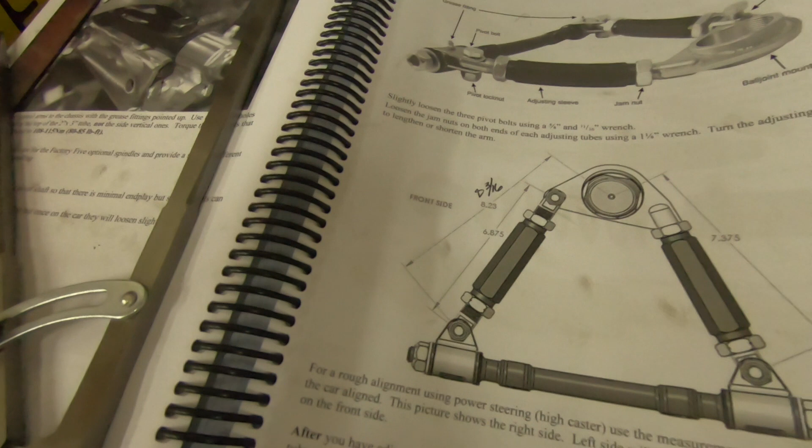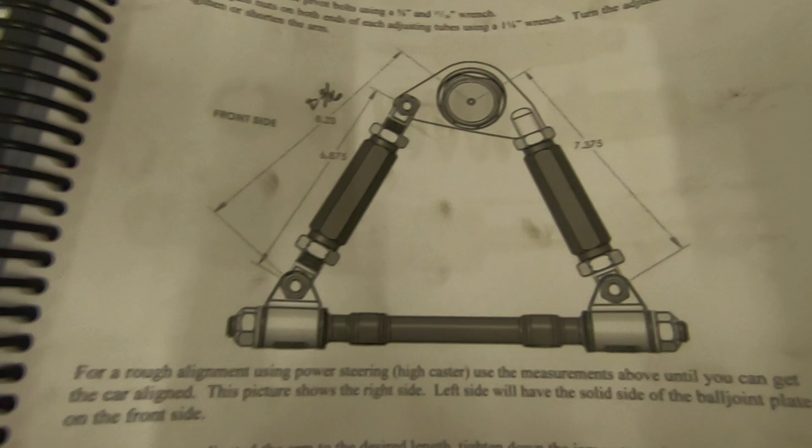I'll show you this first. So I'm going to undo it. Okay, so here is the factory measurements that you need to go off of to rough align your upper control arm, so that you could set it on the wheels and drive it to an actual alignment shop, or do a track alignment with the string method.

This is high caster. I'm guessing they go high caster because in my experience with working with vehicles, more caster gives you a little bit more front end bite. So I'm guessing that's why they're setting it up that way first.

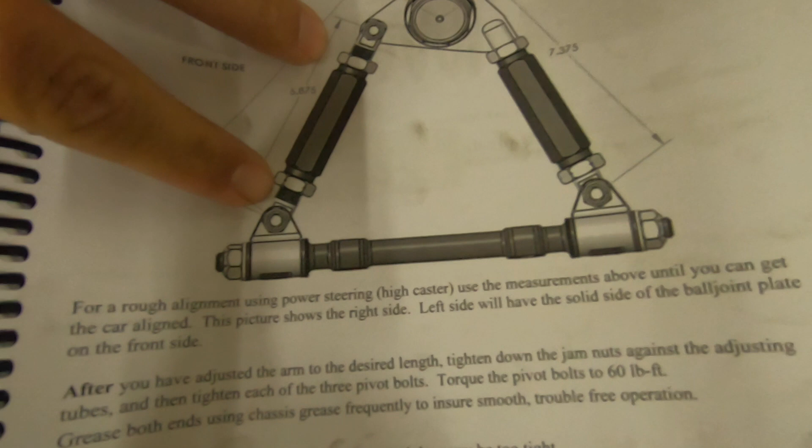So I checked the biggest measurement first, because as you see here, you have thread there with this 8.23 inch measurement from the center of the ball joint where the grease fitting's at to the pivot bolt. That's 8.2, and see how you have thread there, and over here you do not. So I wanted to set that one first.

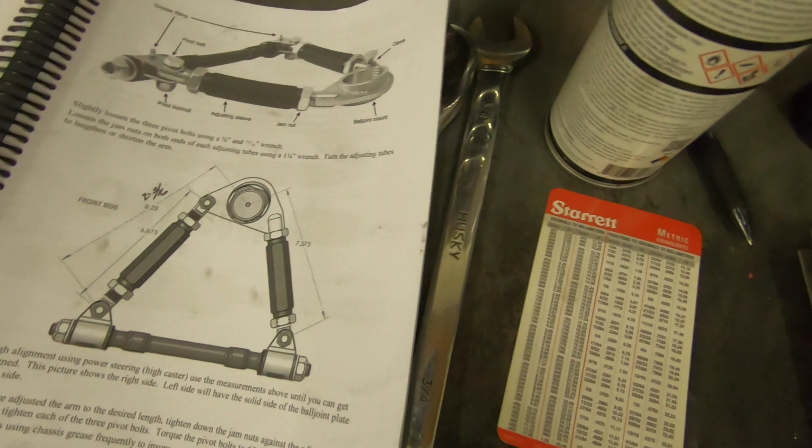So that's what I did. I set it with 8 3/16. That was as close as I was going to get here. Oh, that's a millimeter apart.

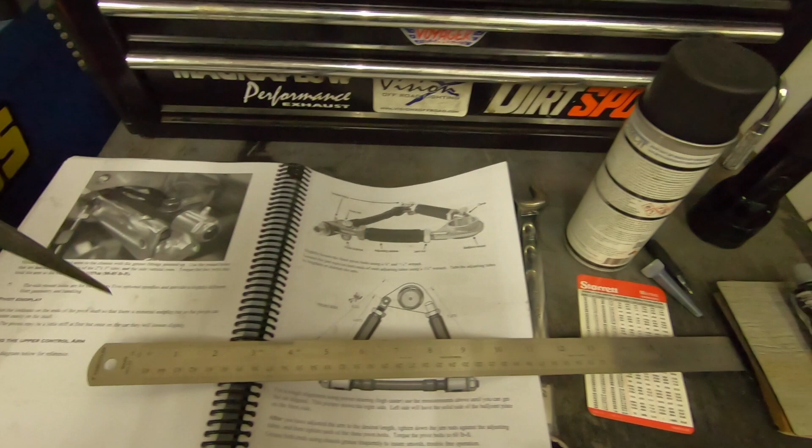So what I did was, alright, now I'm going to put this back. I can't get to it. So I loosen this, find my 8. And what's nice about this ruler is it has lines in it, so you can lock the points into it. And then I went to 8 3/16.

And you could even go smaller increments. See, I don't have the 64ths, because that's really what that is. That measurement is 15/64ths.

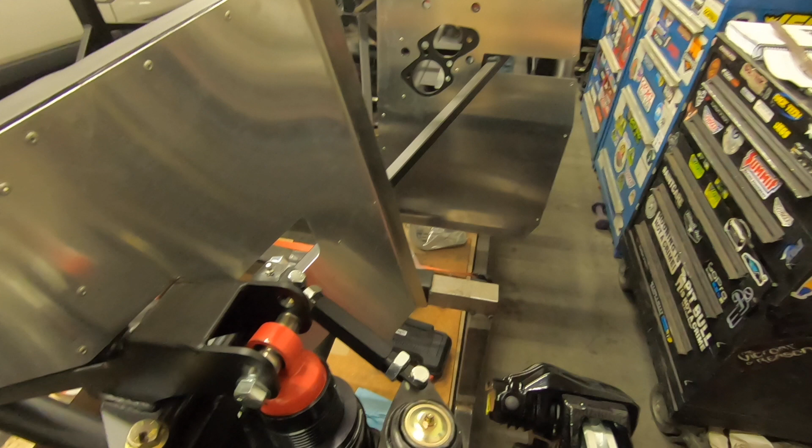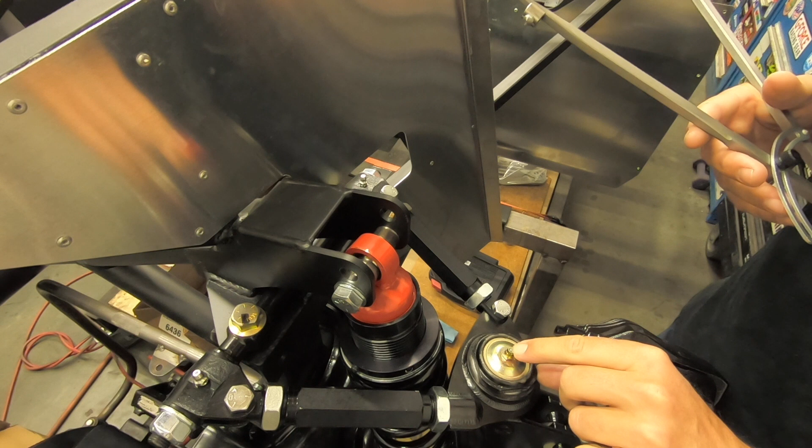So that'll do there. Now I'm going to reset this here so you can see. There's the A-arm there. You're measuring from the center of that pivot bolt to the center of that ball joint, which is like a ball bearing that's on the grease fitting.

It's in the Zerk fitting. It's nice because you can just put it on that Zerk fitting and you can see - actually let's go this way so it's out of the way. From the center there, you can see how far I need to come out with the measurement. And so you twist to get it going in the direction you need it to go.

And it might be, you might need a wrench, but if you do it by hand you can get it moving there. It's a little tough, but it's moving. And you can see how the caster is changing on the whole assembly. Need a little bit more.

Oh, it's starting to hit the coilover. Weirdly. So I'm going to get a little bit of gap there. So that's about it, and you can see, center of the bolt to the center of the ball joint, that's that measurement.

Now you can lock your jam nuts down and move on to the next measurement, which is that measurement there, stated to be 7.375, which .375 is 3/8.

So I went back and I set with my ruler that to 7 3/8 and checked that, and it's way off. Oh, that's because I measured it wrong. So we're almost there. We want 7 3/8.

That's way out there. Wait a minute. I'm an idiot, I'm going the complete wrong direction.